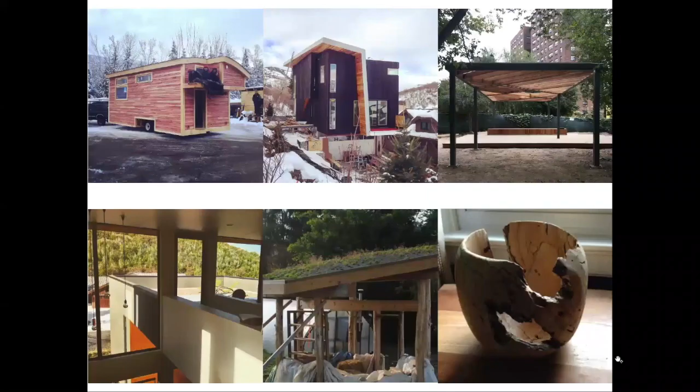I'm with 475. My background is primarily as a contractor and also passive house consultant. These are some images of projects that I've built. I'm a certified passive house consultant under the US system, and also a certified passive house builder. I was mainly doing integrated design build projects where the same team designs the project as builds it. Showing here like a tiny house up in Vermont, some single family homes out in Utah, Park City and Salt Lake City, like this community center in East Harlem area.

Currently been doing a lot more fun little woodworking projects, turning spalted maple, and a living roof cob straw bale project for this little garden center.

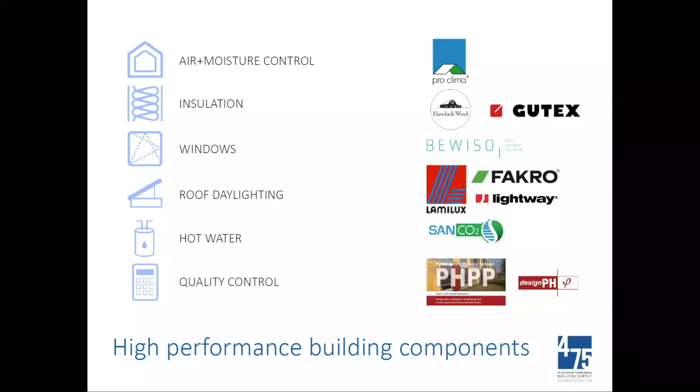Getting more into the presentation, I will be talking about water control, which is different than vapor, which is different than thermal, which is different than air, and I will be using those terms differently. When I'm looking at assemblies - walls, roofs, foundations - I do have a priority list, and this is the order of importance, with water control being number one. It's why we went into caves to begin with: shed the water, kick it away from the building.

Secondly, we're prioritizing air tightness. Air tightness is actually where most of our moisture comes from, and it's also where a lot of our energy loss is from, so we really like to prioritize air control. Then we're looking at moisture control: how is the assembly going to dry through diffusion? We like to have vapor-open exteriors and vapor-variable interiors. I'll get more into the building science around that in this presentation.

Lastly, the fourth most important, we're looking at thermal control, the R value. A lot of folks really do get tunnel vision on the R value, and a lot of the materials that have really high R values per inch do tend to be vapor closed - a lot of the foam-based materials. Our assemblies are getting really thick with high performance projects, and we're inherently limiting the amount of energy that moves through that assembly. So we're no longer baking our walls dry, and we're no longer oversizing our heating and cooling equipment.

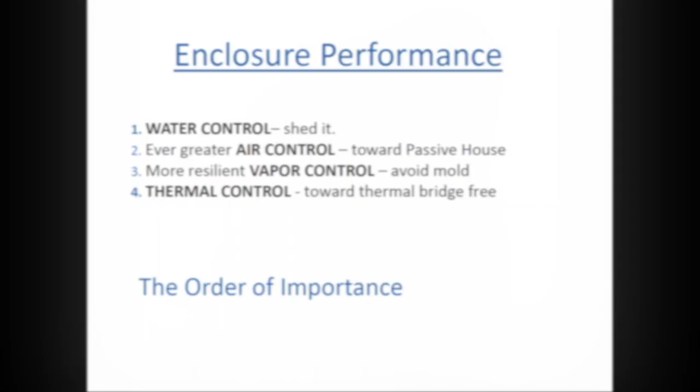Starting at the foundation system, looking at historic masonry assemblies where we're doing all the work from the interior. For foundations where poured concrete is airtight, we're oftentimes using a sub-slab poly membrane between 10 to 15 mils, something nice and robust that won't tear. We're oftentimes bringing that up what's oftentimes a rubble wall. The rubble stone can act as a capillary break, but sometimes we need to be working in a plastic or a piece of metal as a capillary break.

This is pulled directly from our ebooks, showing some examples of what this could look like. We're having a fluid applied against the masonry and the Intello on the interior, all coming down to meet the insulation. We do like to prioritize a foam-free approach.

Against grade, from a vapor control standpoint, we're fine to use vapor-closed materials. We have the 10 to 15 mil poly, that's vapor closed. But it's nice to use very low embodied carbon materials, and insulation is a big part of our overall carbon budget, as is concrete. So you can be using mineral wool boards below grade nowadays. The wood fiber that 475 offers, you do need to keep it above grade or protected from that bulk moisture. The soil is always damp, so the vapor drive is always coming in. But we can be using mineral wool appropriately sub-slab, which is a great use for it.

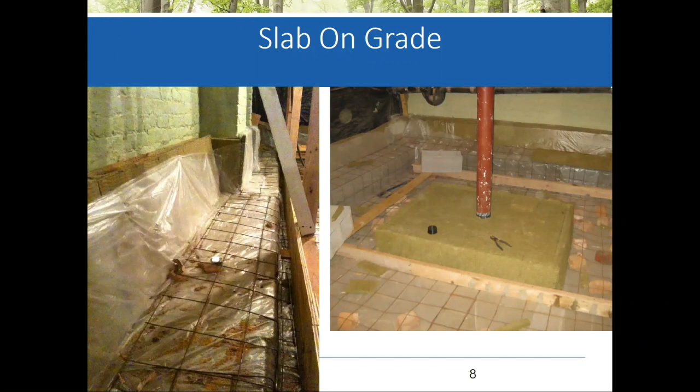So showing here, that sub-slab poly will come up and get taped to the wall. We're using a tape that is fleece backed for this, so we can plaster directly over that fleece tape. 475 offers a wide variety of tapes for a variety of uses. We do have tapes for taping that sub-slab poly membrane, and tapes for connecting that sub-slab poly membrane to your air barrier above grade, or in this case, a concrete wall, which is probably still below grade at this point.

We are oftentimes using gaskets or tapes around any pipes that would interrupt that sub-slab poly. I am seeing a lot of projects use that sub-slab poly install as sort of a testing ground to get their crew on board with taping around pipes and taping seams. It's a good area because you already have redundancy with your air barrier oftentimes with the poured concrete on top.

It is best to do a pre-construction meeting with a true mock-up, oftentimes a window install involved in the mock-up since that's a high risk area. But sometimes it's also nice to get more hands-on practice by just taping sub-slab poly seams and taping around pipes and things. Anything we can be doing to ensure we're setting the next person up for success. Oftentimes that's the designer working with a consultant in the design phase and then trying to bring the builder on board with the project and designs as early as possible so they can get familiarized with this high level of detail, particularly around the air sealing details.

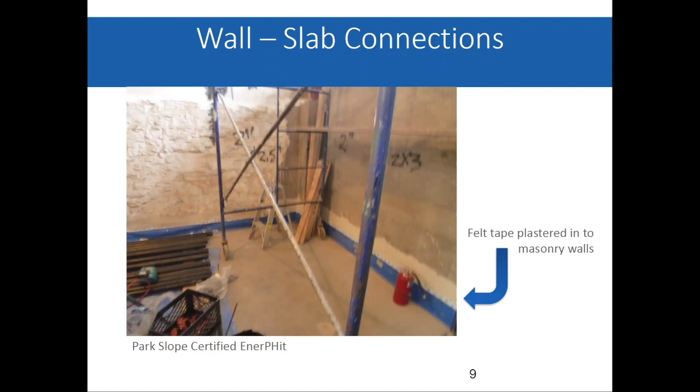Then we're bringing the Intello down to meet the concrete or finished floor, or oftentimes the subfloor if there's a wood floor above. We can be taping the subfloor seams with Tescon Vana tape. We do have an acrylic-based adhesive that comes out of a caulk tube, Contega HF, shown here to the left. Sometimes folks prefer to use more of a sealant that comes out of a caulk tube just in terms of approachability. A lot of contractors are still learning to work with tape as a building material.

But as much as they can start using tape, the better. The Contega HF is a really strong adhesive, comes in sausages or standard caulk tubes, and it won't crack or harden over time. We don't want to rely on silicone-based caulks because those will harden and crack, and it's not a long-lasting air seal. Oftentimes this becomes an issue for our window installs because we are oftentimes using a caulk sealant on the exterior side for landmark projects with masonry, and someone will need to come by and touch up that caulk down the line.

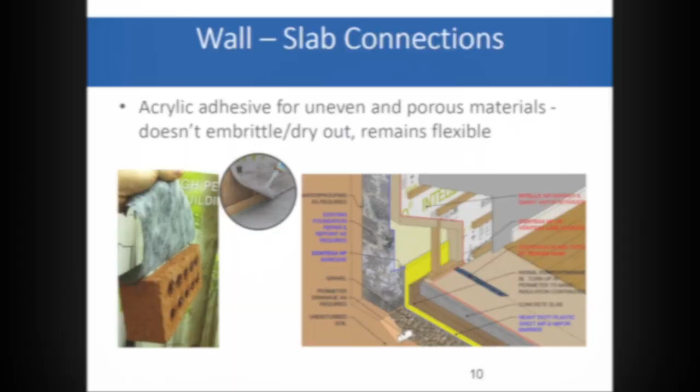So here's our more typical wall assembly for historic masonry with the exterior being on the left. We have a 3-wythe brick. Sometimes some repointing needs to be done on the exterior.

It's really based on existing conditions. On the furthest interior side, we are showing the drywall finish and then a service cavity. I'll show more images of a service cavity later in the presentation, but the general idea is to create a chase so that your electrical equipment isn't interrupting or piercing your air barrier.

Then we have the air barrier being the Intello membrane, a vapor variable membrane that changes how moisture moves through it based on relative humidity. Then we're framing in a wall, often with wood studs if we can, holding those studs an inch or so off the masonry so we can eliminate the thermal bridge by insulating between the stud and the masonry. And then we are treating the masonry so it's at least wind tight, ideally airtight, but at least wind tight.

And you do want that treatment to be vapor open, or vapor permeable. So 475 offers the Visconn fluid-applied material for this, and I'll get more into that later, but I'm also a big fan of lime plaster. It's a natural fungicide, been around for a long time, and doesn't harden and crack like Portland cement.

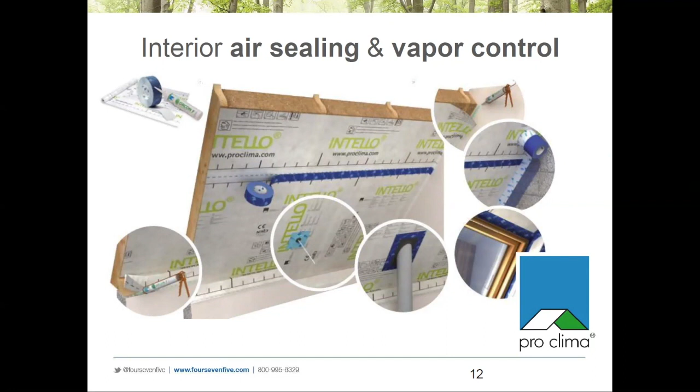So looking at the Intello, this is an interior air barrier. It will keep the conditioned air off that cold surface of the masonry, or if there's a wood framed home, we'd see that being the backside of the sheathing. It is vapor variable, and we need to tape the seams so it stays airtight from one membrane to the other. It doesn't matter too much about shiplapping or anything like that. It's not your water control, it is your primary air barrier and vapor control layer.

So this is showing how it is vapor variable. It changes how moisture moves through it based on the relative humidity. Our vapor drive in this climate actually changes based on the season. In the summer, it's hot outside and we have air conditioning on the interior. Our natural vapor drive is from the exterior coming in, so we need that assembly to be able to dry inwards.

This membrane responds to that high relative humidity and becomes vapor open at 13.2 perms, which is very vapor open. Then in the winter, it's cold outside and warm on the inside. Our natural vapor drive is from the interior going to the exterior, so we want this assembly to be all vapor open outboard of the Intello, so it can dry through diffusion towards the exterior, but we're not moisture loading it with our interior moisture. That's how we keep the absolute moisture content down within these assemblies.

Cold air is dry air, it can't hold as much moisture inherently. So we have a lower relative humidity, and this membrane becomes a class 2 vapor retarder, which also meets a lot of our code standards that we need for roof assemblies. I see a lot of roof assemblies relying on spray foam purely because they're trying to hit something that's a class 2 vapor retarder and airtight.

We are having an interior air barrier behind our drywall. For a lot of the wall, that'll be nice and simple to install just on the interior side of the studs, but things get more complicated whenever we're moving through a floor system or transitioning from our walls to roof in particular. For a lot of townhouse renos in Brooklyn, the floor joists are running from party wall to party wall, and we're mainly air sealing our party walls with a fluid applied and not really insulating, since you can kind of steal your neighbor's energy.

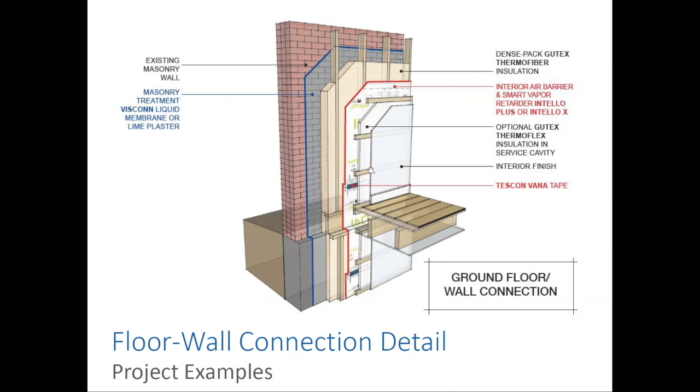Sometimes we want to insulate for soundproofing, or maybe the occupant next door won't be there down the line, so then we'd want to insulate. But for a lot of townhouse work, we're able to just run that Intello continuous directly on through. Sometimes this could look like running a ledger, where we're placing this membrane and then putting some type of ledger board to then support the floor joist. This is where sequencing becomes really key, making sure that your contractor has this membrane on site and that the framers know to install it at this stage.

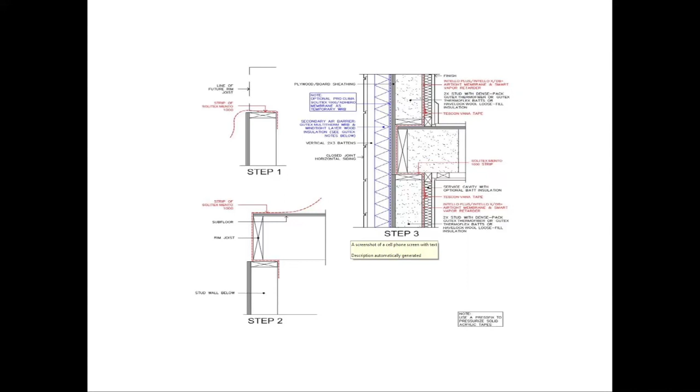There's also this idea of wrapping the rim joist, where at the top plate, we put in a floppy bit of membrane. We then set our rim joist and floor joist system and then lap that membrane up. Down the line, you'll frame a new wall directly on top of that, and you'll have floppy bits hanging above and below that you can tape to down the line. So again, this is how sequencing and staging to ensure they're having this air barrier on site when they need it becomes really key and saves a lot of headache and money down the line.

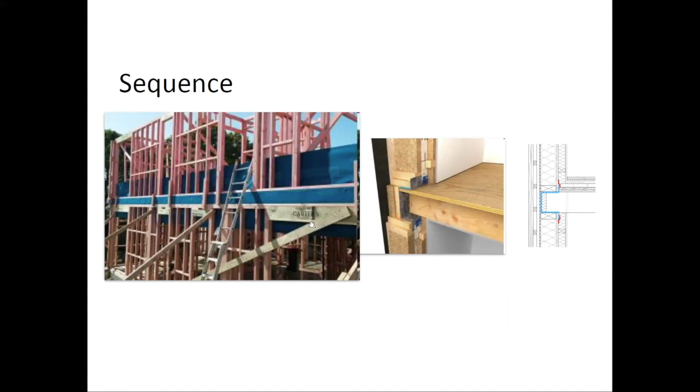So here we're showing that floppy bit of membrane wrapping that rim joist. There's also a version that's more designed for metal studs, a little bit more robust of a membrane. It can act as a temporary WRB as well. That becomes more key for CLT projects, cross-laminated timber is what CLT stands for, or I-joist assemblies. So this membrane's a little bit more robust, longer UV exposure, but same air tightness and vapor control qualities.

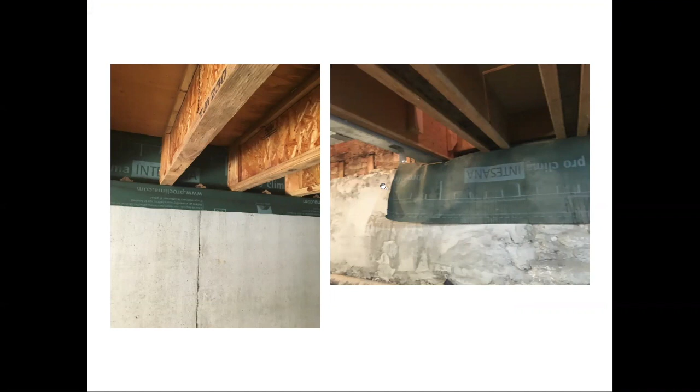Again, just showing wrapping that rim joist. This image on the right is a townhouse reno. They did a skim coat, and then they're putting this membrane to then set their floor joists. They're cutting the joists that were pocketed into the brick, and then that will get a plaster or Visconn directly over. Similar idea here, but this is new poured concrete, probably more of a renovation standpoint, where they're lapping, just putting this little sliver floppy bit, putting their joist hangers directly through.

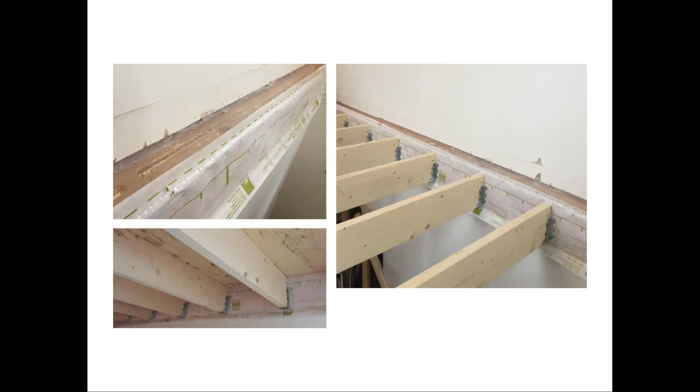You do install this membrane with staples. It is okay to fasten through it as long as you're hitting the structure behind it. So you pinch that membrane and it will stay airtight down the line. Here we're showing our fluid applied air barrier, the Visconn.

The Visconn comes in two forms, a version that is sprayable, which is what we're showing here. The sprayable can be brushed on or rolled on as well, and it can bridge gaps up to 1/8 of an inch, which becomes really key for those floor joists and those joist pockets. Oftentimes the masonry is really rough around there.

Here they're showing sistering the joist. Oftentimes that's needed to re-level, but we want to hold those sister joists a little bit off of the masonry so we can get that air seal connection, and the sister joist isn't in the way.

Here we're showing the version with fibers built in that can bridge up to 3/4 of an inch. So this again becomes really helpful for really rough masonry surfaces.

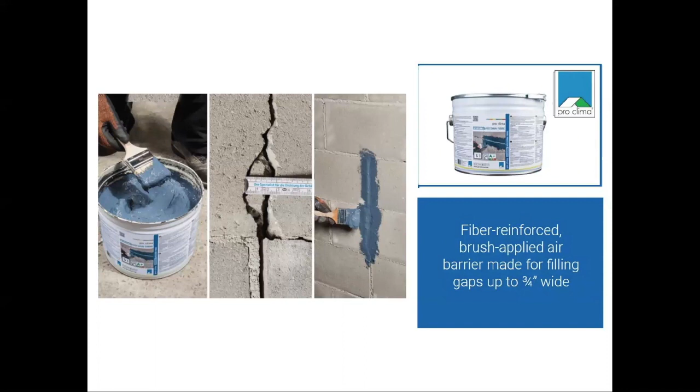I am still oftentimes seeing some level of repointing done. But if you're using the Visconn material, you could have a little bit more forgiveness of what that repointing looks like because you're able to bridge those gaps a little bit better, as opposed to other available competitors where they're only able to bridge like 1/32 of an inch, and then you need a really clean, well done repointing job. While with the Visconn, you can work with more variable conditions.

More for like wood framed renovation, you can use the fluid applied to help transition through that floor system. So the Intello would come up and meet the top plate. It would get taped to that top plate. This image is not showing that tape connection, but there would be a tape connection to the top plate. And then using the Visconn to fluid apply the bays to the rim joist and connecting to that top plate, and then the subfloor sheathing above or the bottom plate above.

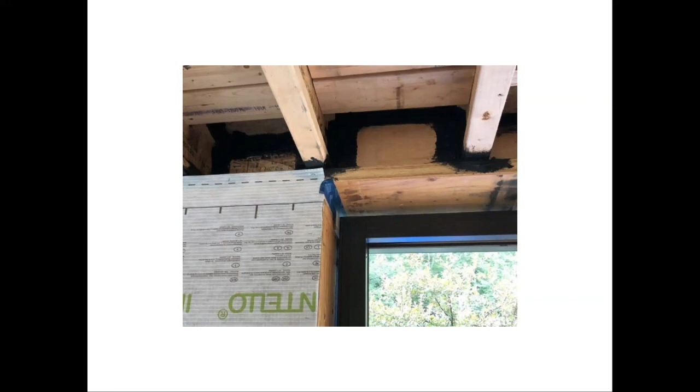So this is where we weren't able to wrap that rim joist, and instead we're coming in afterwards with the fluid applied Visconn. We can just tape around all those beam and joist penetrations. So run the Intello membrane continuous, and then just tape around where it's meeting the Intello there. This is very common. It's fairly easy to do, but just gets a little nitpicky. It's a lot of little taped edges.

But I would say oftentimes existing conditions or whether or not you're able to sequence properly would kind of help make the decision of this, if this is needed or if you're able to wrap the rim joist or use a fluid applied.

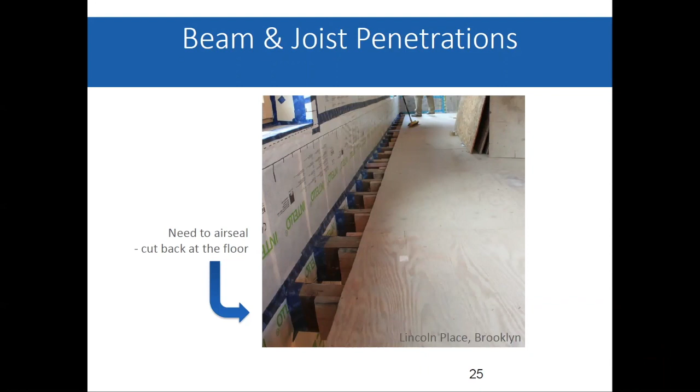I see a question come in about rigid foam and flat roofs. I'll be talking flat roofs in just a bit.

Oh, I guess, sorry, that question's why is it so necessary to have vapor open walls? We want vapor open walls because our vapor drive changes direction based on the season. So we need our assembly to dry in both directions. We don't want to put in something truly vapor closed that wouldn't allow that assembly to dry in that direction. That oftentimes leads to a hard condensing plane where we get kind of a sweating effect or vapor damming and having a lot of moisture build up.

Flat roofs where you're oftentimes using a vapor closed roofing finish, an EPDM or TPO, so we have different considerations. Showing, again, just taping around. This is a stone material on this masonry, taping around the joist systems.

The sister will become an issue because you could have airflow between those sister joists into the masonry. We do have a little bit more forgiveness with party walls since it's not conditioned air on the other side of the party wall. Here we're showing running that Intello continuous through, and we might have some strapping that will interrupt to help brace that wall.

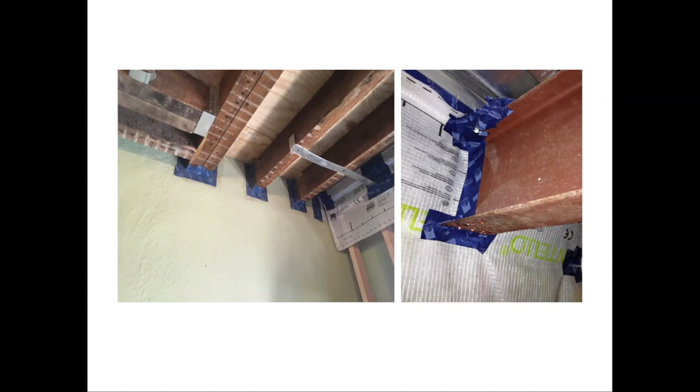Again, just tape around it. Metal beam. The I-beams have a lot of little flanges to tape around, so it gets a little more nitpicky. And it's metal, so it's more of a thermal bridge, and that's why we're seeing some condensation.

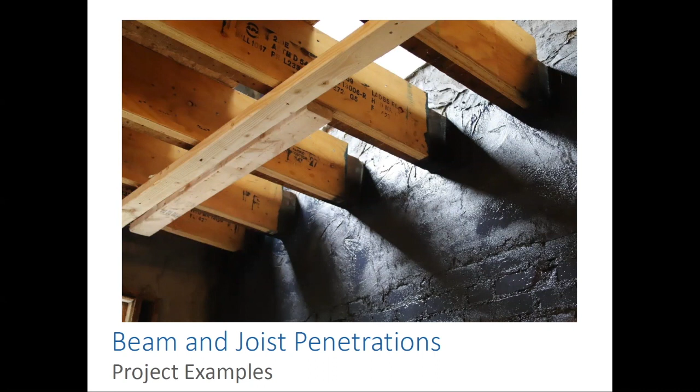Again, just sort of a clean fluid applied install. Really simplifies things. I find for these high performance projects, a lot of the budget is just bringing the building team up to speed. And so as much as we can save on labor, the better. Especially the larger the project, that becomes more and more key.

Here we're showing if you do need to insulate that party wall, we're first having the Visconn fluid applied, and we're bringing that up the joists a bit to get that air seal where the joist is pocketed. We are insulating, that could be wood fiber insulation, Gutex coming from 475. We want this to be vapor permeable.

And then we have the Intello membrane. We may or may not have a service cavity, and for the Intello, we might need to tape around if we weren't able to wrap with these kind of joist pockets.

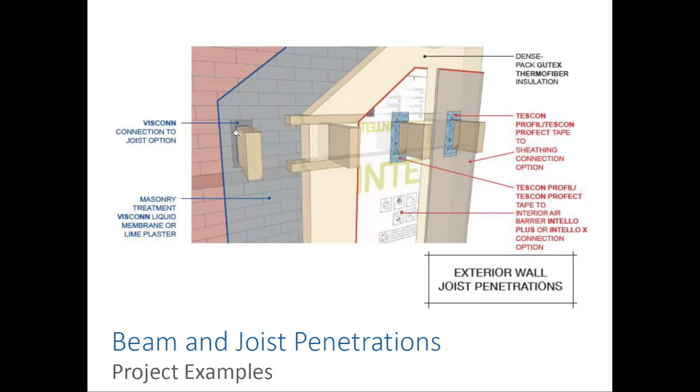Then we're filling in with a batt or blown-in fibrous insulation, and oftentimes having a DensGlass vapor-open sheathing layer. Then we're oftentimes having a peel and stick membrane, the Adhero product. The Adhero product is vapor permeable, it's watertight, and it's airtight. It's fully adhered, like a giant piece of tape, so you don't need to tape any seams, you just overlap them. And then we have exterior rigid insulation.

This could be the Gutex Multitherm or some type of board insulation that's vapor permeable. And then we have a rain screen vented system and whatever siding finish. Some projects aren't able to have a rain screen, maybe their lot lines are an issue or something.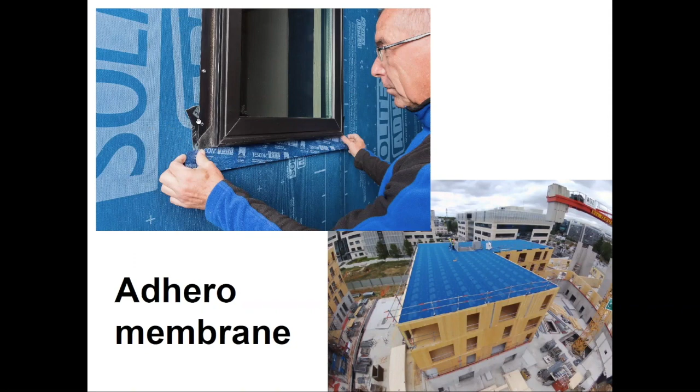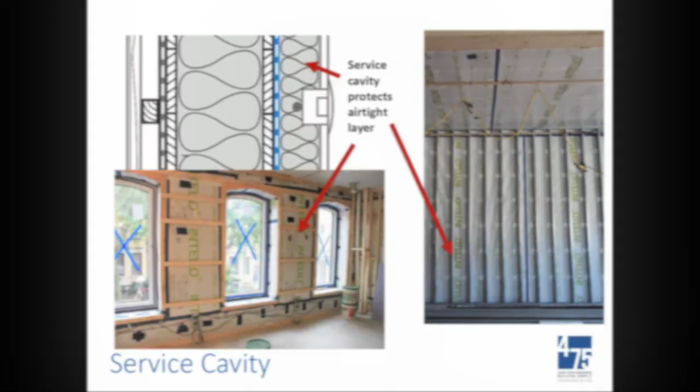Again, service cavity, Intello coming in to tape directly to the windows, hang your outlets in the service cavity, taping the seams. Nice big tilt and turn windows.

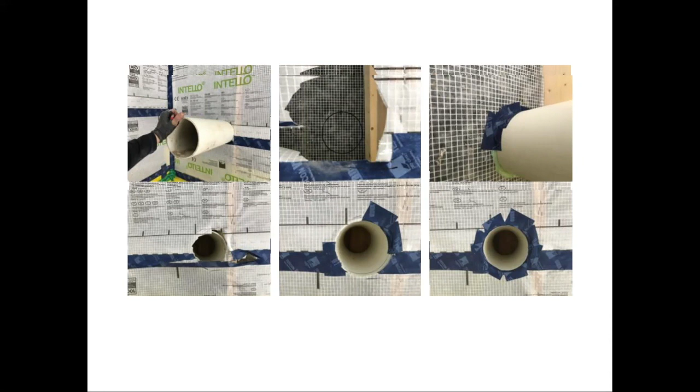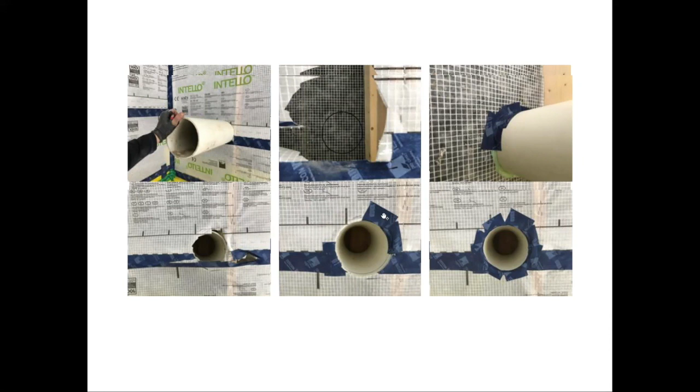Maybe you can't have a service cavity, or you'll have some pipes running through. We do have gaskets for pipes, but if you weren't able to sequence properly, or it's an existing pipe you can't get a gasket around, we can do what's called hula skirt taping, where it's a bunch of little feathering pieces of tape moving around that round pipe. That's how we're getting an air seal all the way around.

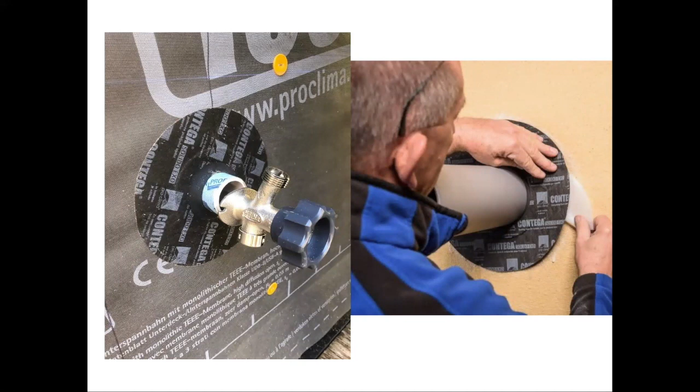Here's showing the gaskets, the Roflex Solido gaskets. These are EPDM gaskets with tape built in. They come in different diameters where the EPDM sits nice and tight as an air seal and waterproofing around whatever pipe or wire. There's tape integrated in, so you're taping it to your WRB on the exterior or your primary air barrier on the interior, the Intello membrane. This tape is also fleece backed, so you can plaster directly over it.

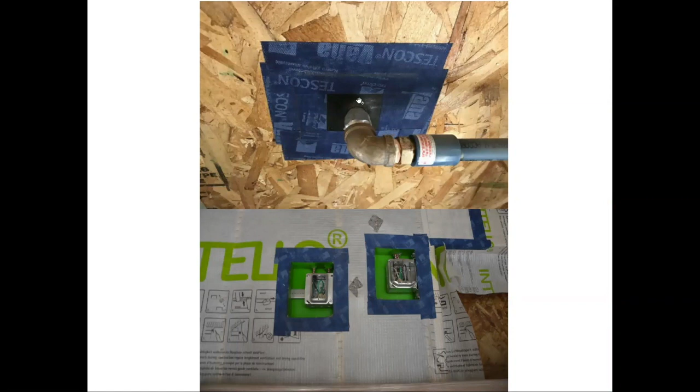Here we're showing more of the standard EPDM gasket. I have seen folks just cut this to whatever diameter on site, and then they use a tape connection with the Tescon Vana tape, the same tape that's used to tape the membrane seams.

If you're not able to have a service cavity, we do offer airtight outlet boxes. Devil's in the details for these high performance projects, especially in air sealing, and air sealing around your outlet boxes can become a pain pretty quickly. So you would place your outlet within this airtight box and then tape where the wires penetrate through that box, so that becomes a little nip.

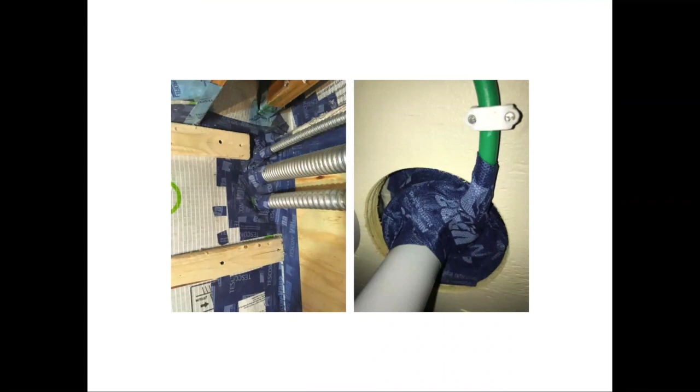This is what it most often looks like on site, just a whole pile of tape. Uncertain if you got a strong enough air seal, apply another layer of tape. It's vapor permeable, so we're less worried about moisture damming at these locations. But this is oftentimes where we're walking around during the blower door test, feeling with our hands or a smoke stick while the air barrier is still exposed, so that way we can seal any of the penetrations.

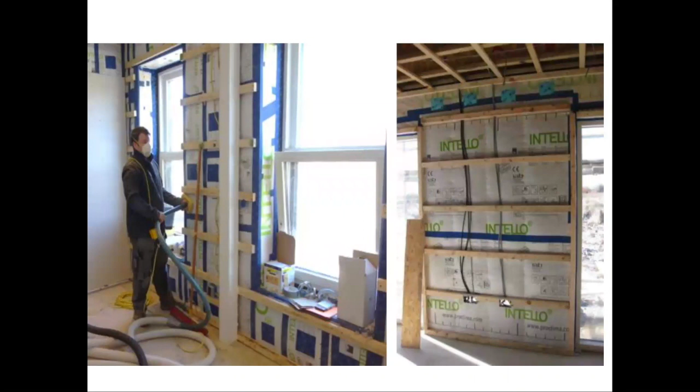Again, showing that surface cavity. It also helps support dense pack insulation such as cellulose, Havelock wool, or Gutex thermofiber, the wood fibers blown in. That way it helps prevent any billowing of the Intello membrane, so that your sheet rockers can come and install nice and quick.

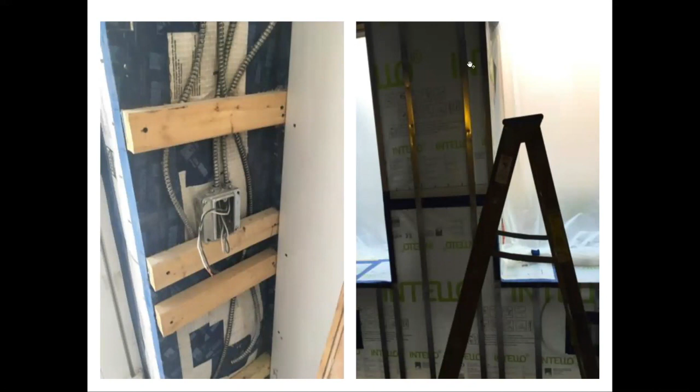Metal strapping to help pinch that membrane in a different way. You're not running your outlets there, but this is like a double stud metal frame project in Brooklyn. So here we're showing the Intello from the roof coming to meet the party wall that has been air sealed with a fluid applied air barrier.

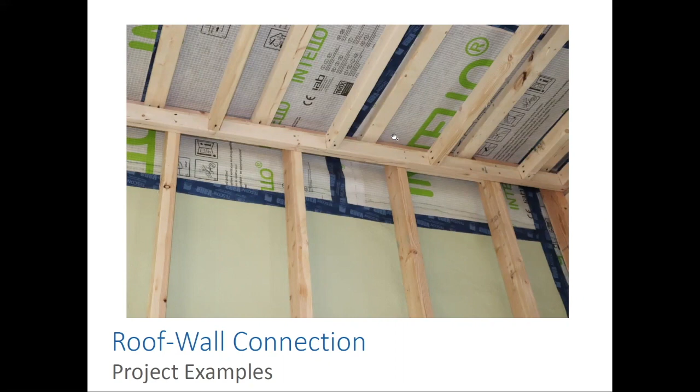Again, sequencing - making sure that they're running the Intello membrane before they're framing in this wall and roof system here, before they place these top plates. Once they place the top plates, they will be in the way. So we want to make sure we are sequencing properly.

Again, this is pulled right from our ebooks. Oftentimes we're trying to really get a very high R value for the roof system. You just want to put as much insulation in your roof as possible, and ideally something vapor open and fibrous. So we have our finished roofing membrane - TPO, EPDM - and then some kind of roof sheathing, maybe that's existing, maybe that's a new layer of OSB or something.

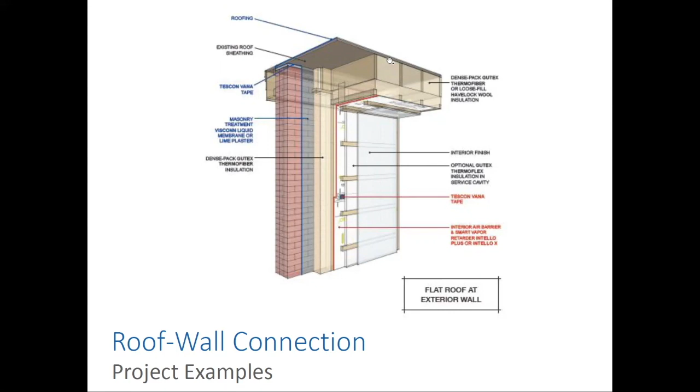We have our existing rafters, and then sometimes we need to have a little bit of a drop where we're using a piece of plywood or OSB webbing to then attach a new framing member. That way we can create this cavity even deeper to allow more cellulose, more hygroscopic blown in insulation, and then the Intello membrane on the interior side of this.

We have a great blog post called 10 Golden Rules for Unvented Flat Roofs. This is a really good resource. Flat roofs are particularly tricky - it's a vapor closed exterior, so we can only dry towards the interior. So that's where this is a good resource blog post that I'm sure Johnny will throw in the chat.

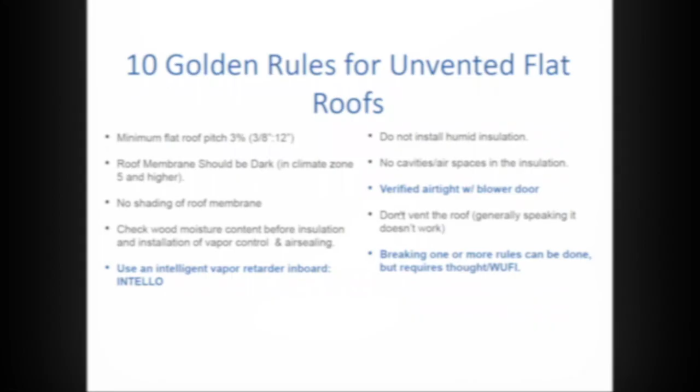So looking more at these flat roof assemblies, the assembly can only dry inwards. We have a vapor closed finish membrane up here. There's times when the assembly wants to dry in, but there's also times when the assembly wants to dry outwards, and it won't be able to. So the Intello allows that assembly to dry inwards when it wants to, but it won't moisture load that assembly when it wants to dry outwards.

This is how we're steadily reducing the moisture content within this insulation, within the flat roof, by using this vapor variable membrane. It's also how we meet code, because it's a class 2 vapor retarder. And if your insulation's touching it, now by code, we can call that insulation airtight as well.

It is helpful for this membrane to be black, because then it absorbs the solar gain and pushes the vapor drive inwards. A lot of folks want to have solar panels, which would shade that membrane, or they want to use a white membrane to combat the heat island effect. But from a building science standpoint, we want to be pushing that vapor drive inwards as much as possible.

If you are topping with rigid insulation, just make sure that you're not trapping any materials between that rigid insulation and the finished membrane. The rigid insulation will most likely be vapor closed, and the finished membrane is vapor closed. We want to try and make sure we're not creating a bathtub within our walls and roof systems, because we are trapping all the moisture in between.

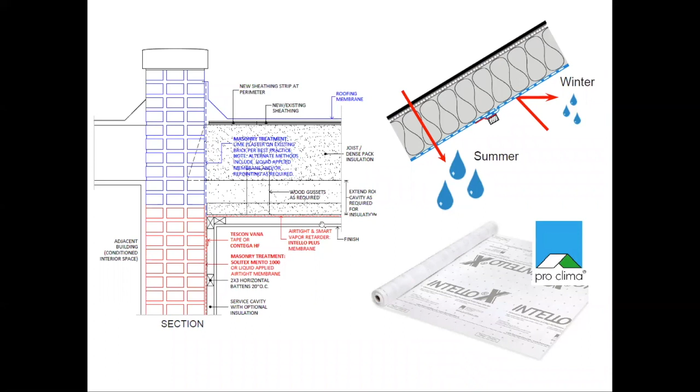So we want to be vapor closed on the exterior for this flat roof with TPO or EPDM or similar, and then a vapor variable Intello membrane on the interior with fibrous vapor open insulation in between.

We also offer skylights, glass roof systems from Lamilux. What's really nice about these is the curb is pre-installed, and it's an airtight connection, super insulated and thermal bridge free. Triple or quadruple pane with krypton or argon gas to get really low U-values. Glazing, especially the install of our windows, doors, and skylights, is particularly risky. It's nice to have this curb already installed to the unit, and then we just lap up our finished membrane and tape directly to the Lamilux.

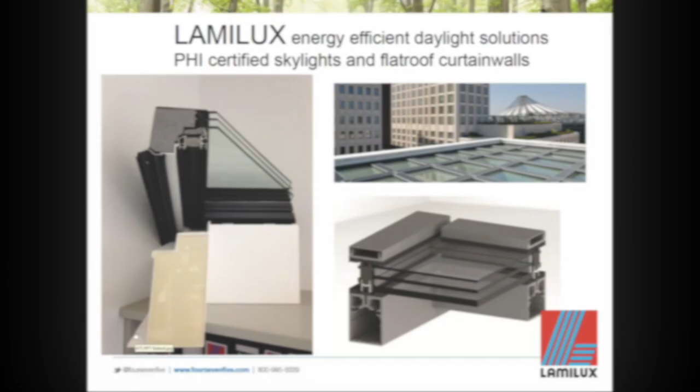Looking at our window installs: for a lot of historic masonry projects, we're not really able to touch the exterior. Sometimes we're able to get an exterior tape connection if we have a brick mold. Oftentimes we have that for the header and jambs, but often we just have the existing stone sill. You might be able to get a tape connection there, or maybe that will need to be a caulk connection that would need to be touched up.

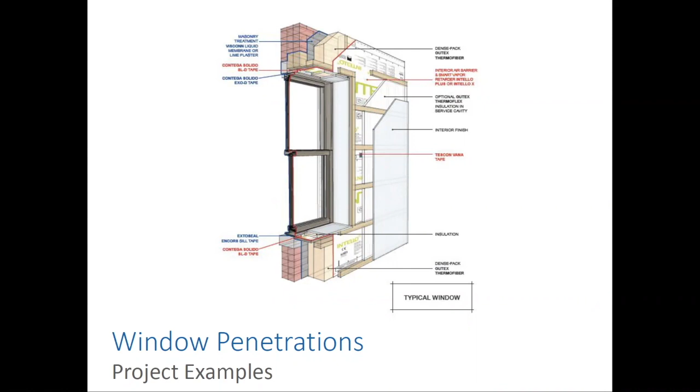The Intello will come and meet and directly tape to that window frame on all sides of the interior, insulating with vapor open insulation. We are not using can foam around our windows. Can foam is vapor closed, and it will oftentimes create more condensation buildup at that connection. It's also not dimensionally stable; it will shrink over time.

So looking at some of the tape options for window taping: for the exterior, we have a vapor closed tape that's used only at the sill, the Extoseal Encors. That's oftentimes face taped, or sometimes it's brought all the way to the interior and back-dammed.

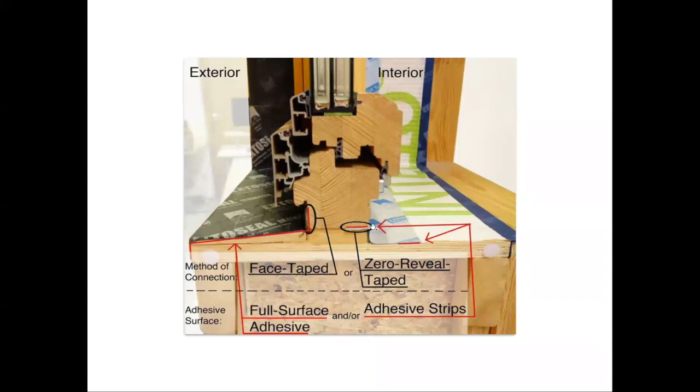On the interior, we can do a face tape, or we can do a zero reveal tape, a double-sided tape. The zero reveal tape is more appropriate if your drywall finish dies really close to the frame. It oftentimes means you need to pre-tape the window before you set it in place, which creates a really easy install if you're able to do that.

Window corners become particularly hard as well, so it's a little bit of origami where you're doing a small cut, overlapping the tape, and getting a tape connection. I oftentimes see someone whose job is just to do the corners, walking around doing it consistently for every window.

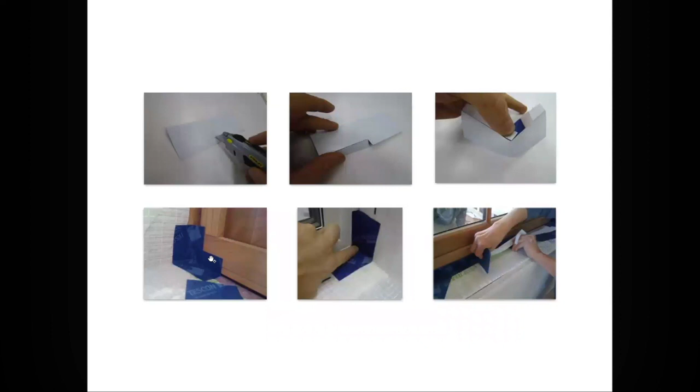Here we're showing pre-taping before setting the window in place with the Tescon Profil tape, setting the windows on sawhorses to pre-tape it. These triple pane windows and doors are incredibly heavy, so sometimes they need to be craned directly into place, or pretty close to it. So this might not be an option, and we sometimes do need a face tape.

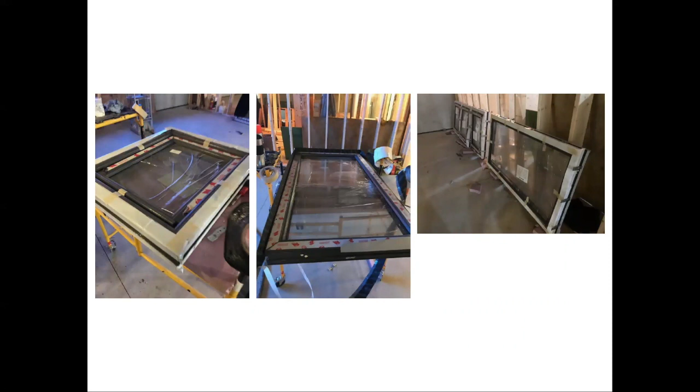Here we're showing that double-sided pre-tape, stuffing with fibrous insulation, in this case mineral wool, around the exterior. That tape just laps up and tapes to the waterproof jamb using the Tescon Vana for waterproofing. On the interior, that's showing a plywood buck - it'll lap up and tape directly to that plywood buck. Oftentimes we're trying to encase whatever window strapping within the tape, since that could be a thermal bridge concern, but also an air leakage concern. They would need to tape all the seams of the plywood as well, along with the end grain, because you can actually have air movement between the plies of plywood.

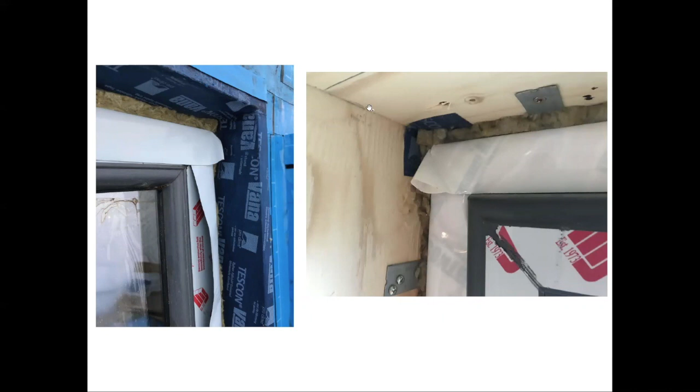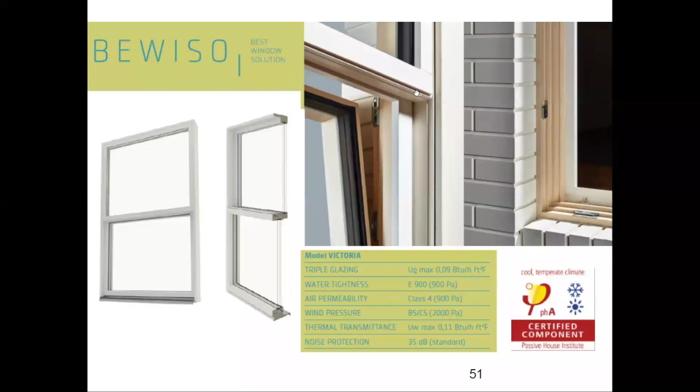Now we're going to pass it over to our daylighting member, Akshaya, to talk about the Bewiso and Optowin windows and doors. The Bewiso are the wood framed windows more designed for landmark projects, where it can be meeting existing conditions. So, Akshaya.

Yes, hi. I'm Akshaya and I recently joined 475 as a daylighting product consultant, and I rep doors and windows. Some of you, if you're familiar with 475, may already be aware of Bewiso, as Nick mentioned, a company we work with that offers wood windows and doors, and they can also be tailored to landmark projects.

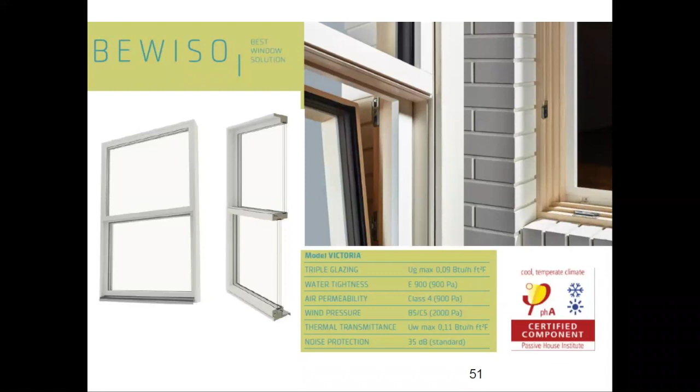I'm here to introduce you to Optowin, who we began to work with more recently. It's an Austrian company that manufactures aluminum clad windows and doors. A little bit about the company background: they were founded in 1932, they're pretty well established in Austria, and they'll be celebrating their 90th anniversary in 2 years. They've also received recognition, winning the Passivhaus Component Award in 2014 and 2015. They also pride themselves on being a family business - they're on the 4th generation now.

There are 5 frames that Optiwin offers that can be divided into 2 categories: the all-round Passivhaus compliant systems and the Passivhaus certified systems. The difference is really in the design as well as the performance.

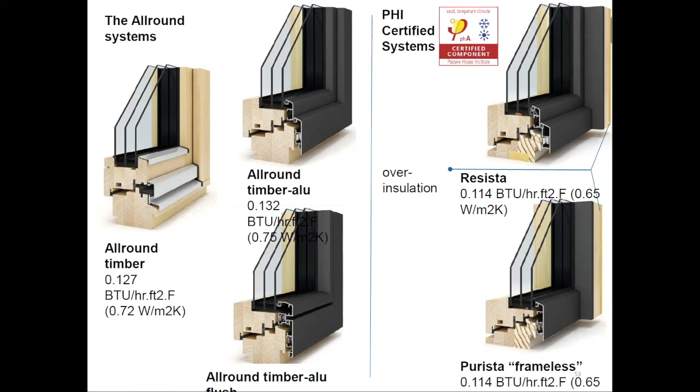There are 3 all-round systems: the all-round timber, with a U value of 0.127, and they're timber windows with just a little bit of aluminum cladding for protection. Then there are the all-round aluminum clad windows with a U value of 0.132 in imperial. The frames are pretty similar except for the design. The flush system, which is at the bottom, performs about the same, and it's really the design that's different.

Then you have the Passivhaus certified windows. They have more stringent U values, that's 0.114, and they're also over insulated along the jambs to offer a smoother thermal transition with the walls. The Purista system at the bottom is a frameless system, so the jambs disappear into the walls and you only have the head and sill. It offers a really sleek appearance, and it's often coupled with the Resista for the doors, because you can't have handles without jambs.

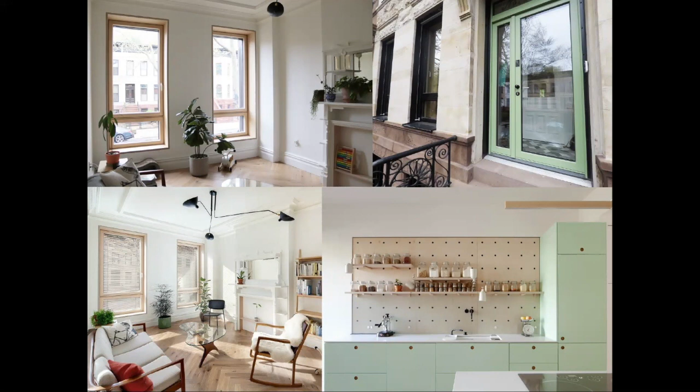I think we often associate windows and doors with views. When it comes to Passivhaus performance, they're often a prime area for thermal bridging. So you want to make sure you have triple glazed windows with really robust frames so they perform thermally well, and you want to create comfortable spaces.

Looking at this project, another aspect that comes to mind is that they can also offer a lot to design. Co-adaptive Architecture works with creating interesting lines, and in this project they used a lot of clean lines and an interesting, minimalist color palette to set themselves apart. You can really see here how the clean lines for the windows and doors and the matching palette really complement the design.

Some of the more common questions we get with windows and doors are what materials they offer. With Optiwin, the standard is spruce, and they also offer fir, larch, oak, and a type of reclaimed wood which appears to be aged.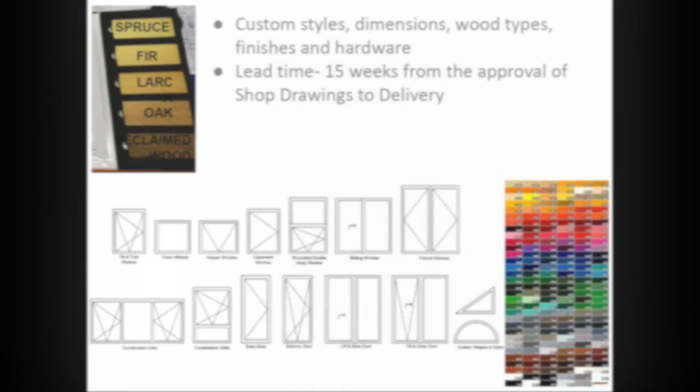Make sure to do blower door tests to inspect, verify, and measure your success. Do a blower door test as early as possible, ideally after the air barrier is installed but before the windows and doors, and then again once the windows and doors are installed, and then probably one final one. I'm commonly seeing at least 3 blower door tests for passive house projects, but more the better.

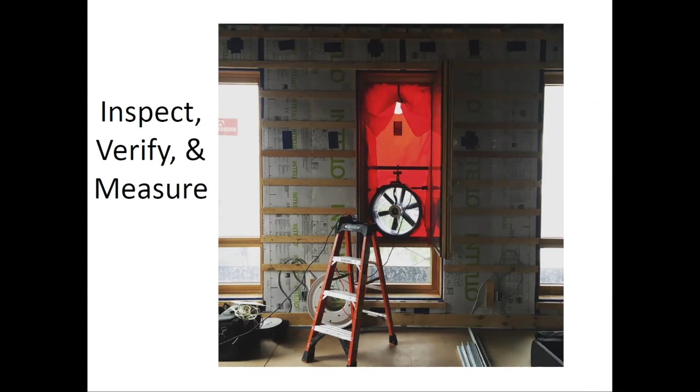I encourage contractors to get blower door testing equipment. I have also seen folks just set up a big fan with some type of shroud, whether it's a poly membrane or something, just to pressurize the building envelope to track leaks, even if they're not truly measuring it. That can still be helpful.

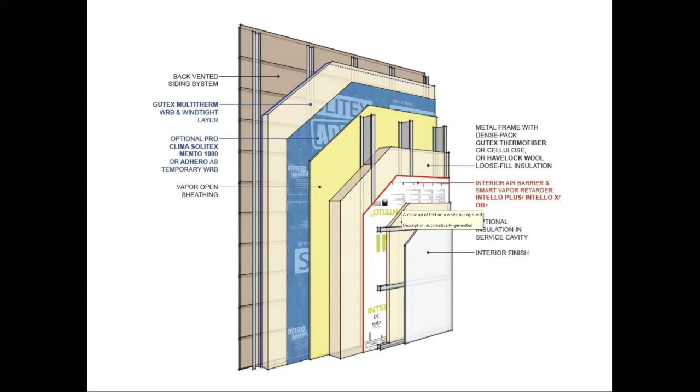There's a question regarding exterior membranes: do you have a membrane which works like the Intello, just in reverse? We don't. We tend to want to be vapor open in this climate as possible on the exterior. I understand the idea of, okay, if we're moving up the vapor curve for the Intello on the interior like this, if we could somehow flip that so it's the opposite for the exterior, that makes sense to me, but I don't know of any technology that functions that way.

So on the exterior, we tend to be as vapor open as possible, and ideally use membranes that are monolithic, which is what our membranes are. A lot of the older technology, Tyvek, Typar, those types of house wraps, are vapor open, but they're microporous, meaning there are little holes in the membrane that expand or contract, sort of like how paper works. Those pores can clog or deteriorate over time, and wood tannins actually deteriorate those pores. So they don't tend to be as durable or long lasting, both as an air barrier and as a water resistant barrier. While 475 membranes are monolithic and require active vapor transport along a molecular chain, so there are no little pores that can clog or deteriorate. It also means you can use the same membrane for the roof as for the wall and just lap it directly over, since it will be truly watertight down the line.